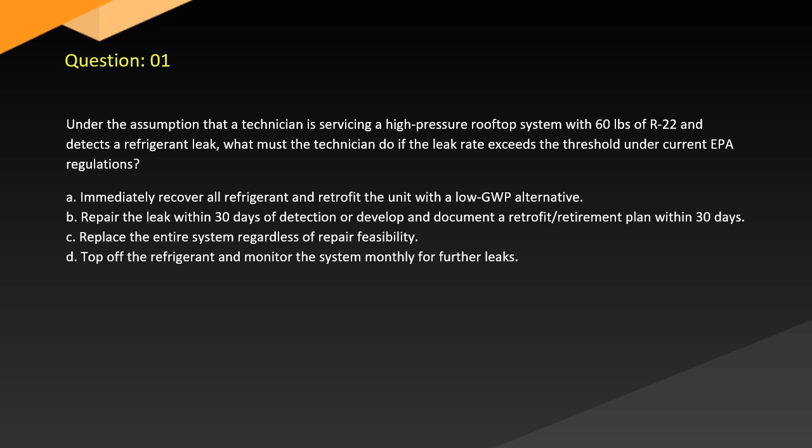Answer: Correct answer B. Explanation: For systems containing 50 pounds or more of refrigerant, EPA requires that leaks be repaired within 30 days if the leak rate exceeds 20% annually for comfort cooling or 30% for commercial refrigeration, per 40 CFR Part 82, Subpart F. If repair isn't feasible, a retrofit retirement plan must be documented within 30 days.

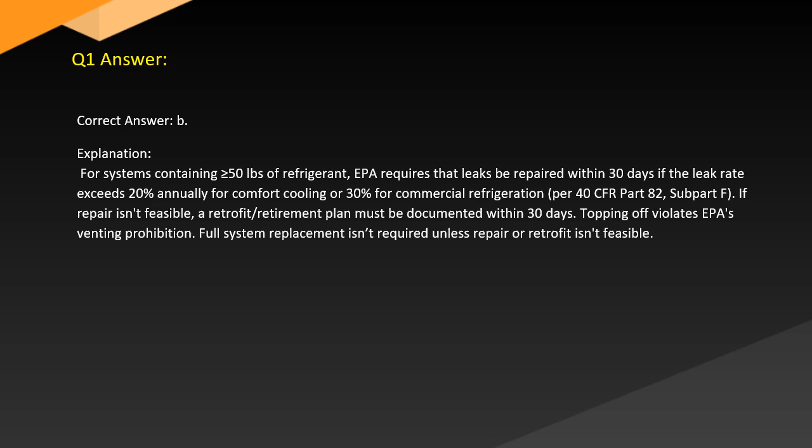Topping off violates EPA's venting prohibition. Full system replacement isn't required unless repair or retrofit isn't feasible.

Question 2. By evaluating the recovery method for a high-pressure appliance that has a functioning compressor and holds over 15 pounds of R-410A, which recovery technique must be used according to EPA regulations?

A. Passive recovery, using internal pressure to force refrigerant into a container. B. System-dependent recovery, relying on system pressure, a non-mechanical method. C. Active recovery with self-contained recovery equipment capable of achieving mandated vacuum levels. D. Gravity-fed transfer into an unpressurized recovery drum.

Answer: Correct answer C. Explanation: EPA requires the use of active, self-contained recovery equipment for appliances containing more than 15 pounds of refrigerant, per 40 CFR 82.156. Passive recovery is not permitted for high-pressure appliances.

System-dependent recovery is limited to small appliances. Only active recovery ensures required vacuum levels per EPA evacuation requirements, Table 1, 40 CFR 82.156.

Question 3. In light of recent developments, a facility upgraded a high-pressure chiller to use a new refrigerant blend with higher operating pressures. The technician plans to reuse the existing pressure relief valve. What should the technician consider?

A. Relief valves can be reused as long as they have not discharged. B. A new relief valve is only required if the refrigerant is flammable. C. Relief valves must be rated for the new refrigerant's pressure and replaced if incompatible. D. Pressure relief valves are universal and need no modification.

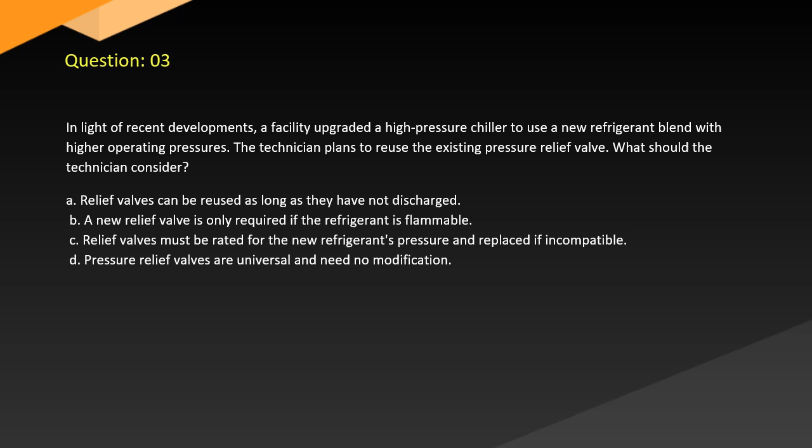Answer: Correct answer C. Explanation: Pressure relief devices must be compatible with the new refrigerant's pressure characteristics. Using an old relief valve may result in under or overpressurization.

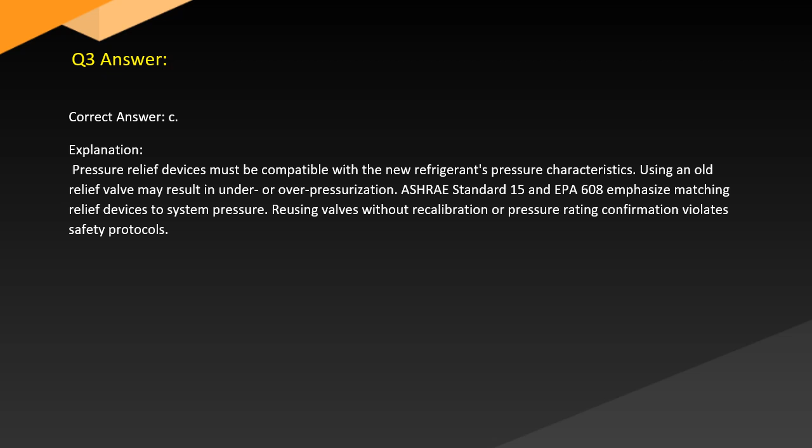ASHRAE Standard 15 and EPA 608 emphasize matching relief devices to system pressure. Reusing valves without recalibration or pressure rating confirmation violates safety protocols.

Question 4. While examining refrigerant blends used as substitutes for phased-out HCFCs, why is it critical to charge a zeotropic blend like R-407C in the liquid state?

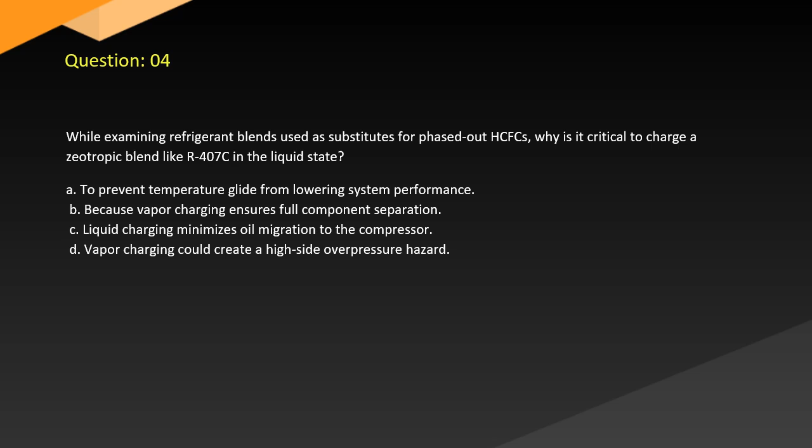A. To prevent temperature glide from lowering system performance. B. Because vapor charging ensures full component separation. C. Liquid charging minimizes oil migration to the compressor. D. Vapor charging could create a high side overpressure hazard.

Answer: Correct answer A. Explanation: Zeotropic blends, e.g. R-407C, have component refrigerants that evaporate at different rates, leading to composition shift during vapor charging. Charging in liquid form ensures blend integrity, preventing fractionation and maintaining temperature glide within expected limits.

Per AHRI Guideline N and EPA guidance, vapor charging is prohibited for blends like R-407C.

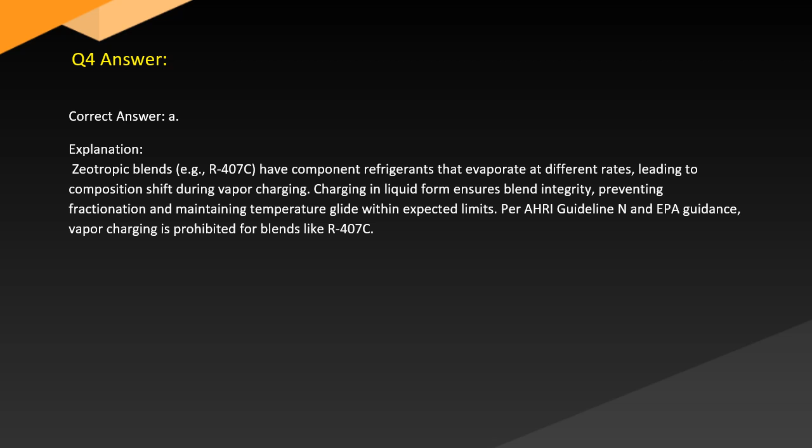Question 5. From a practical standpoint, which of the following is a compliant and safe method for transporting recovered refrigerant cylinders? A. Storing the cylinder horizontally in a sealed plastic container.

B. Securing the cylinder upright with proper DOT labeling in a ventilated vehicle. C. Placing the cylinder in the passenger seat with air conditioning on. D. Keeping the cylinder in the trunk with windows closed to avoid vapor escape.

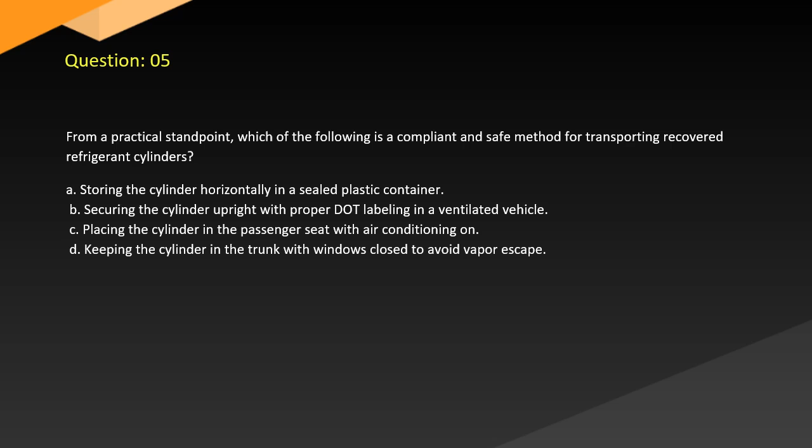Answer: Correct answer B. Explanation: Regulations 49 CFR Parts 171, 180 and EPA guidelines require that recovery cylinders be upright, properly labeled, capped and transported in a ventilated space. Storing horizontally may damage valves.

Closed environments risk asphyxiation or fire hazards if leaks occur. Safety mandates upright transport with appropriate cylinder marking, e.g. refrigerant recovery.

Question 6. Considering the evidence, a technician is charging a high-pressure R-410A system with a fixed orifice metering device. What is the most accurate method to determine proper charge?

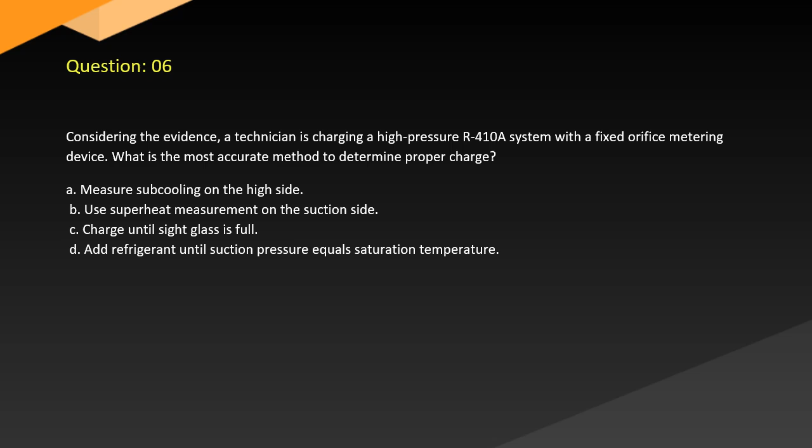A. Measure subcooling on the high side. B. Use superheat measurement on the suction side. C. Charge until sight glass is full. D. Add refrigerant until suction pressure equals saturation temperature.

Correct answer: B. For systems with fixed orifice metering devices, the superheat method is recommended to ensure proper charge per manufacturer specs and EPA guidelines. Subcooling is more accurate with TXVs. Sight glasses are unreliable, and suction pressure alone doesn't reflect charge accuracy. EPA 608 training materials and AHRI/ACCA protocols support superheat charging in these cases.

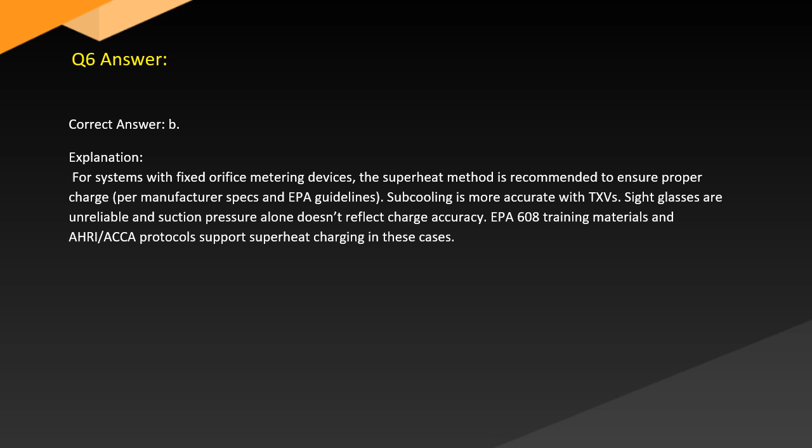Question 7. Demonstrated by best practices when evacuating a high-pressure system with over 200 pounds of R22 before opening the system for service, what minimum vacuum level must be achieved using recovery equipment manufactured after November 15, 1993? A. 10 inches of Hg. B. 15 inches of Hg. C. 0 inches of Hg. D. 10 millimeters Hg absolute.

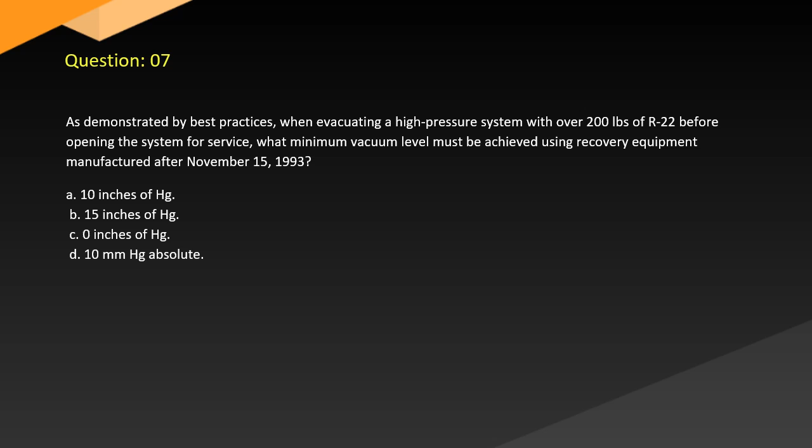Correct answer: D. According to EPA Table 1 of 40 CFR 82.156, for high-pressure appliances with over 200 pounds of refrigerant, recovery equipment manufactured after 11/15/1993 must evacuate to 10 mm Hg absolute. This ensures removal of both refrigerant and moisture. Using inches of mercury or imprecise measures does not meet the regulatory standard for evacuation.

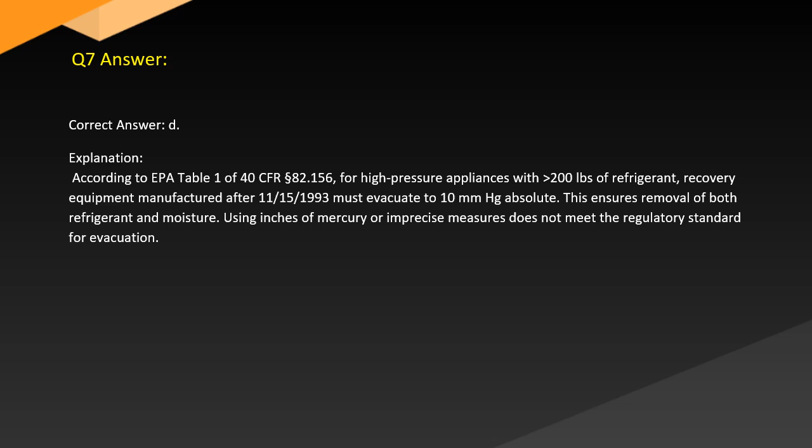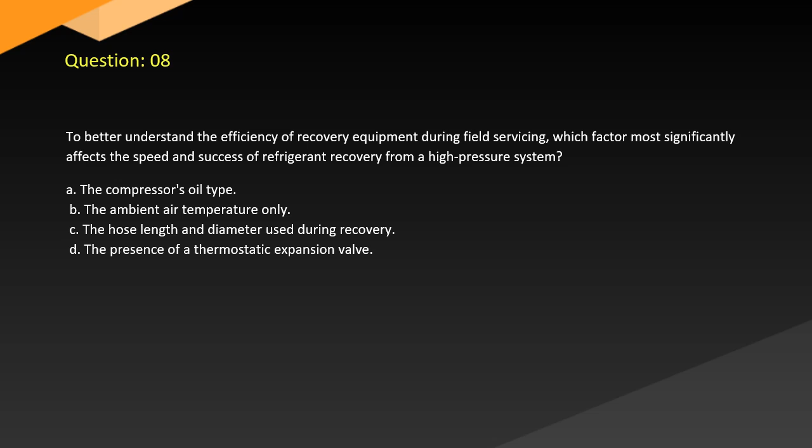Question 8. To better understand the efficiency of recovery equipment during field servicing, which factor most significantly affects the speed and success of refrigerant recovery from a high-pressure system? A. The compressor's oil type. B. The ambient air temperature only. C. The hose length and diameter used during recovery. D. The presence of a thermostatic expansion valve.

Correct answer: C. Hose size significantly impacts recovery time. Shorter hoses with larger internal diameters reduce pressure drop, increasing flow rate, as supported by EPA and equipment manufacturers. While ambient temperature has some effect, it's secondary; oil type and metering devices do not directly affect recovery efficiency. Always follow recovery equipment guidelines.

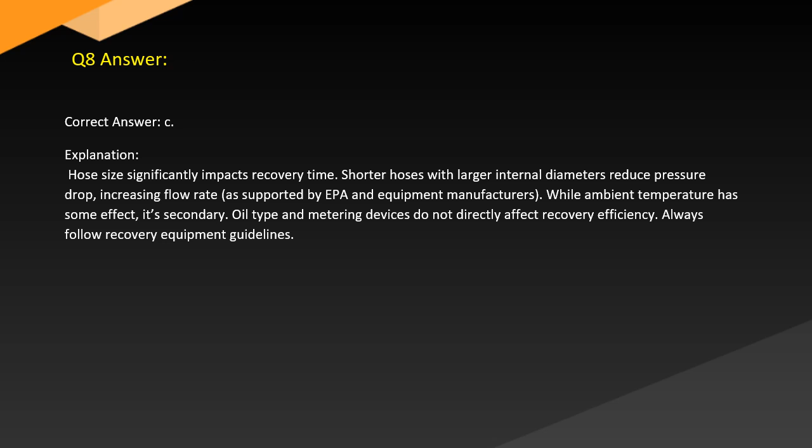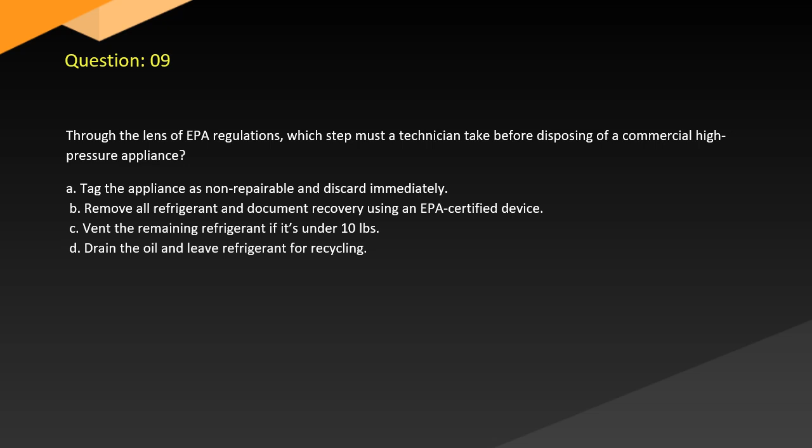Question 9. Through the lens of EPA regulations, which step must a technician take before disposing of a commercial high-pressure appliance? A. Tag the appliance as non-repairable and discard immediately. B. Remove all refrigerant and document recovery using an EPA-certified device. C. Vent the remaining refrigerant if it's under 10 pounds. D. Drain the oil and leave refrigerant for recycling.

Correct answer: B. EPA prohibits venting of refrigerants per 40 CFR 82.154. Technicians must recover all refrigerant using certified equipment and maintain proper records. Failure to recover refrigerant prior to disposal violates the Clean Air Act. Tagging or draining oil alone does not satisfy the recovery requirement.

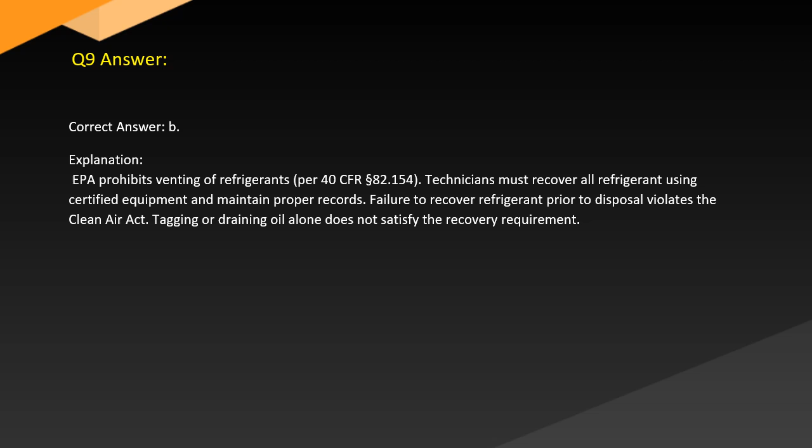Question 10. Given the circumstances, Mr. Bennett is servicing a commercial refrigeration rack system and needs to isolate a leaking evaporator coil without recovering refrigerant from the entire system. What is a compliant method to isolate the component? A. Close service valves to isolate the coil and leave refrigerant trapped. B. Use a recovery machine to pull refrigerant from the coil before opening it. C. Open the coil and let the system's high pressure expel the refrigerant. D. Lower system charge by venting to atmosphere and isolate afterward.

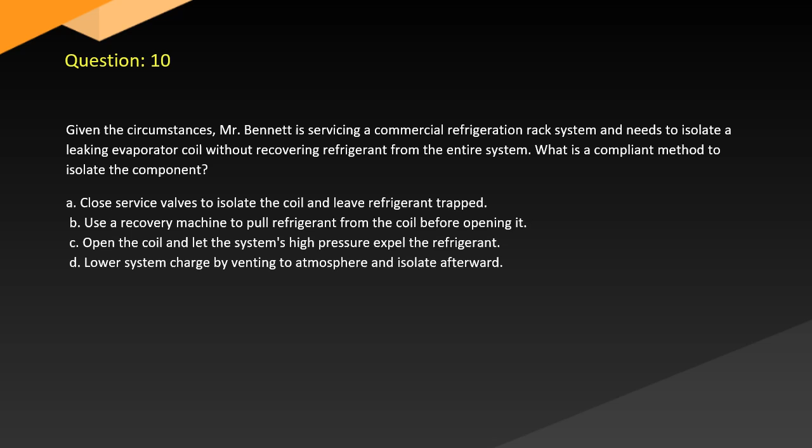Correct answer: B. EPA regulations, 40 CFR 82.156, require recovery of refrigerant before opening any part of the system. Even isolated components must be evacuated to required levels. Venting refrigerant or relying on valve isolation without recovery violates the Clean Air Act. Using a certified recovery unit is the only compliant method.

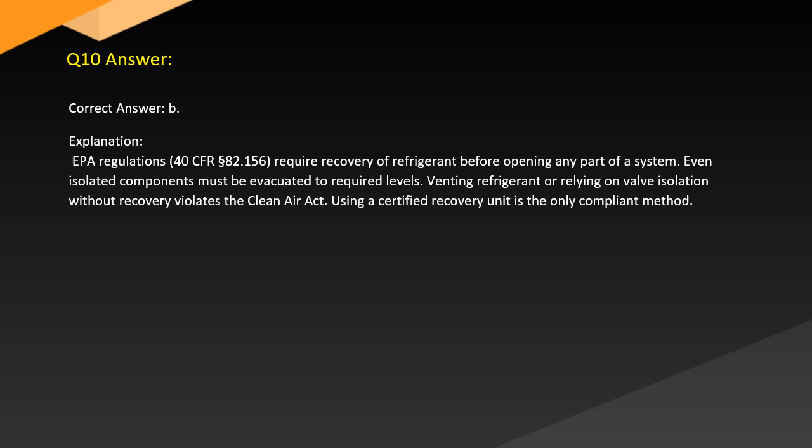Question 11. A detailed analysis of a high-pressure recovery cylinder revealed rising pressure during storage even though ambient temperatures remained constant. What is the most likely cause? A. Excess lubricant entering the cylinder during recovery. B. Cylinder valve left partially open after sealing. C. Presence of non-condensable gases in the recovered refrigerant. D. Low refrigerant purity due to oil breakdown.

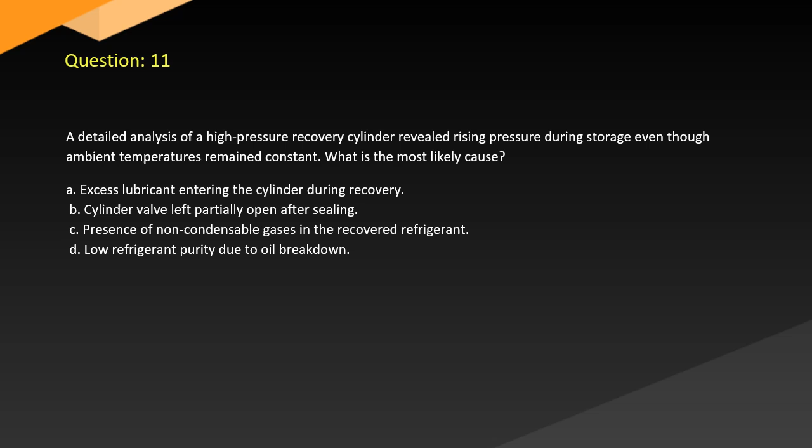Correct answer: C. Non-condensables, such as air and nitrogen, do not condense under normal system pressures and temperatures, increasing system or storage pressure, according to EPA guidelines and ARI Standard 700. Recovered refrigerant must be tested for purity, especially before reuse. These contaminants degrade system efficiency and may trigger safety valves. Valve or oil issues wouldn't explain stable ambient pressure rise.

Question 12. Contrary to popular belief, why is it unsafe to use mineral oil with R-410A in high-pressure systems? A. Mineral oil causes high moisture retention in R-410A systems. B. Mineral oil reacts chemically with hydrofluorocarbons, causing corrosion. C. R-410A has poor miscibility with mineral oil, risking inadequate lubrication. D. Mineral oil solidifies under high pressures generated by R-410A.

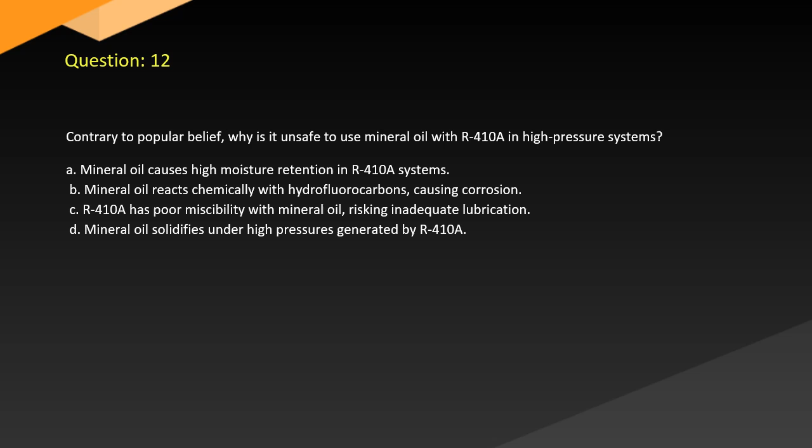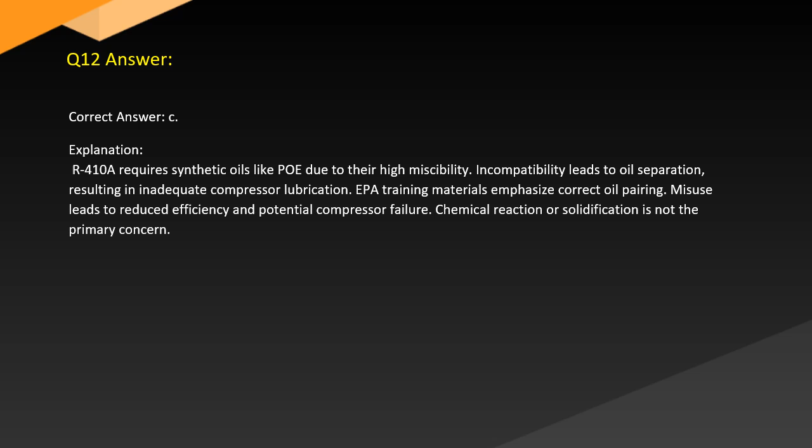Correct answer: C. Explanation: R410A requires synthetic oils like POE due to their high miscibility. Incompatibility leads to oil separation, resulting in inadequate compressor lubrication. EPA training materials emphasize correct oil pairing. Misuse leads to reduced efficiency and potential compressor failure. Chemical reaction or solidification is not the primary concern.

Correct answer: C. Explanation: Opening a high side port under system pressure can release pressurized refrigerant rapidly, risking frostbite, burns, or hose rupture. EPA safety guidelines mandate depressurization or system shutdown before such actions. There is no immediate oil freezing or acid formation at this stage. Backflow relates to improper cylinder use, not port access.

Question 14. The underlying principle of installing a receiver in a high-pressure system is to: A. Prevent liquid refrigerant from reaching the expansion device. B. Isolate oil from refrigerant before it enters the metering device. C. Temporarily store excess liquid refrigerant during system operation. D. Directly filter out moisture from the suction line.

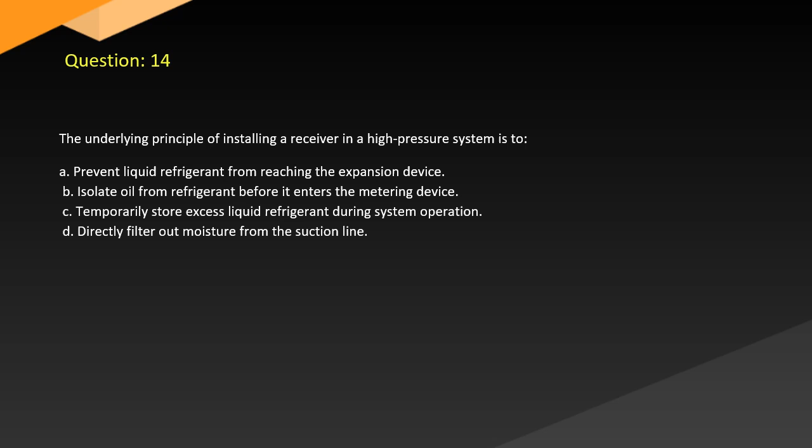Correct answer: C. Explanation: Receivers store excess liquid refrigerant downstream of the condenser, especially in systems with variable load or ambient conditions. They help prevent flooding of the evaporator or metering device. Moisture removal is handled by filter dryers, not receivers. Accumulators on suction lines protect compressors, not receivers.

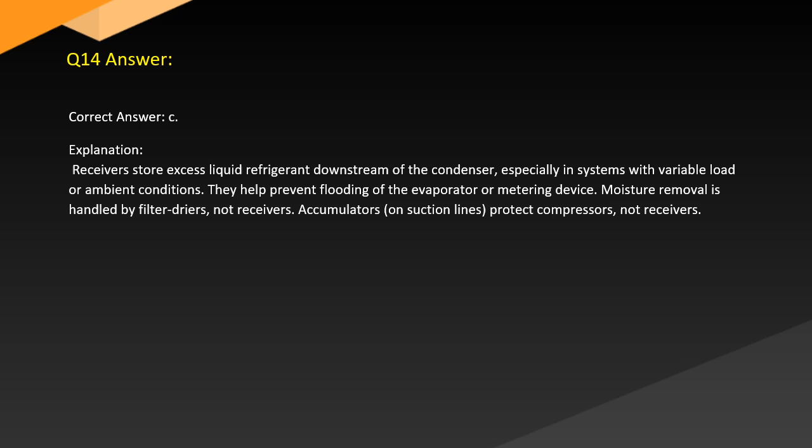Question 15. In comparison with previous inspections, a supermarket technician notes that a 250 lb R404 rack system has lost 75 pounds in 90 days. What is the leak rate and is it within EPA limits? A. 27%. Must be repaired or plans submitted. B. 32%. Exceeds limits and must be repaired within 30 days. C. 24%. Within acceptable EPA threshold. D. 30%. Requires retrofit. Plan only if repair isn't feasible.

Correct answer: B. Explanation: Leak rate equals 75 divided by 250, times 365 divided by 90, equals approximately 32%. For commercial refrigeration, EPA's maximum annual allowable leak rate is 20%, per 40 CFR Section 82.157. Leak exceeding that must be repaired or addressed with a documented plan. 32% exceeds limits and requires corrective action within 30 days.

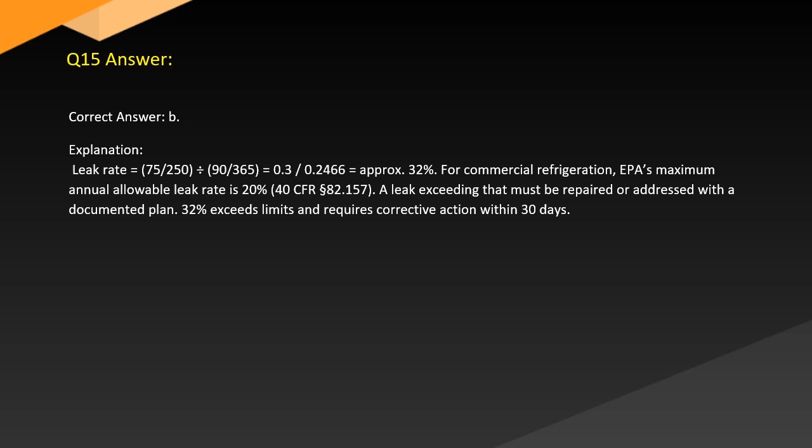Question 16. By comparing moisture removal techniques, which condition best facilitates deep system dehydration using a vacuum pump? A. Using a high CFM vacuum pump on a warm system. B. Applying heat while pumping through the suction port only. C. Operating a vacuum pump while charging refrigerant vapor. D. Recovering oil first, then evacuating with an air compressor.

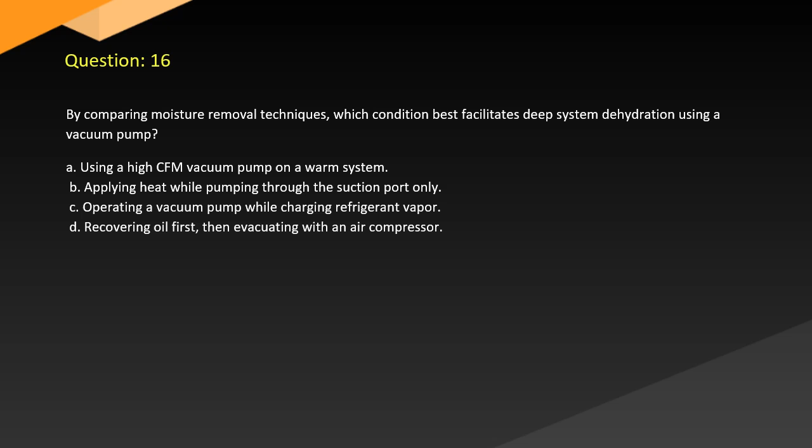Correct answer: A. Explanation: Heat increases moisture vapor pressure, enhancing vacuum pump effectiveness. A high-capacity pump reduces evacuation time. Charging during evacuation introduces contaminants. Air compressors are not approved. EPA and ASE guidance stress warm systems and proper CFM rating for thorough dehydration.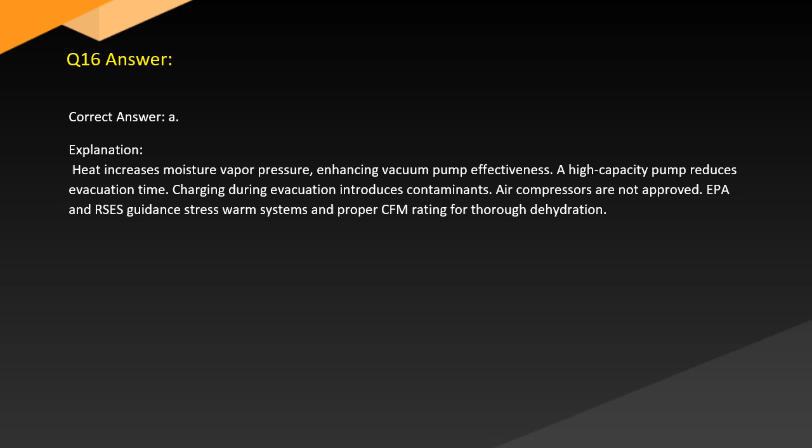Question 17. From multiple perspectives, what is the most appropriate response if recovered R22 is suspected to be contaminated with air? A. Return it to the system slowly to avoid damage. B. Filter and reuse it immediately. C. Send it to a certified reclaimer for processing. D. Vent the air portion and reuse the refrigerant.

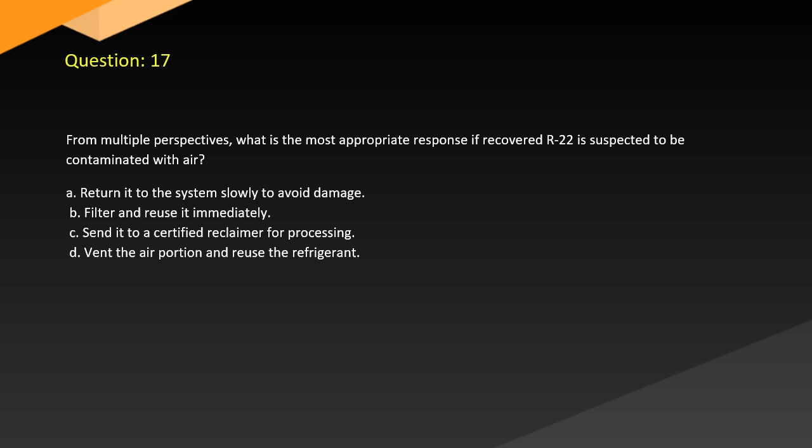Correct answer: C. Explanation: Venting is illegal under the Clean Air Act, 40 CFR Section 82.154. Reuse of contaminated refrigerant can damage systems. Only certified reclaimers, EPA certified under Section 608, can restore refrigerant to AHRI 700 purity. Filtering doesn't remove non-condensables. Reuse without reprocessing violates EPA and AHRI standards.

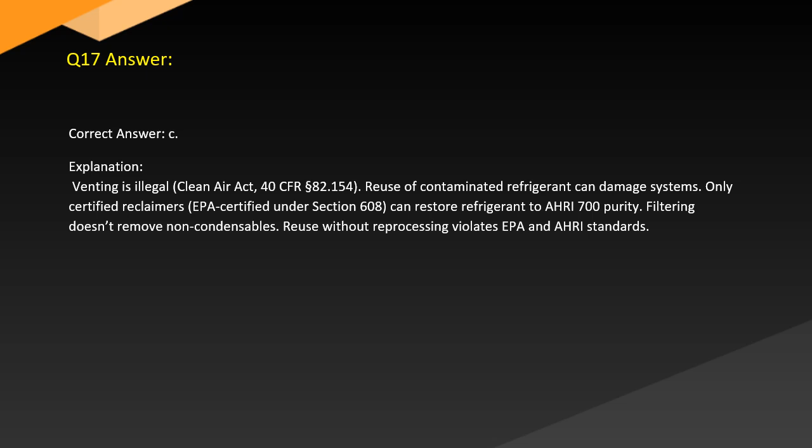Question 18. As evidenced by best practices for R410A systems with microchannel coils, which charging method is most accurate and prevents system damage? A. Superheat method regardless of metering device. B. Use of a charging chart with pressure temperature matching. C. Weigh-in method using manufacturer's exact charge. D. Charging until the suction line feels cool.

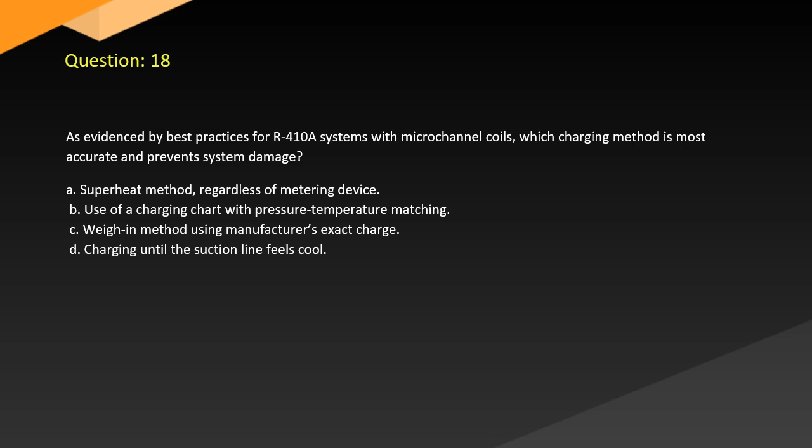Correct answer: C. Explanation: Microchannel systems are charge sensitive. Manufacturers specify precise charge amounts that must be weighed in. Feeling suction lines is imprecise. Superheat or subcooling is valid under certain conditions, but weigh-in ensures compliance with factory specs. EPA and OEM manuals favor weighing for accuracy and system integrity.

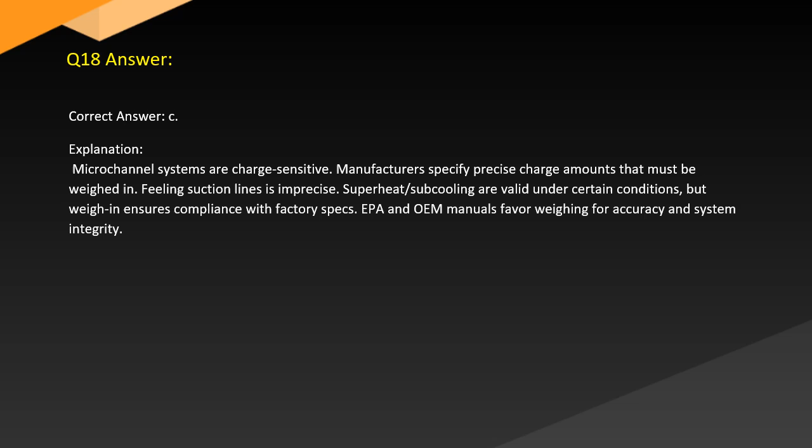Question 19. The core principles of Section 608 of the Clean Air Act primarily aim to: A. Restrict manufacturers from producing new refrigeration appliances. B. Eliminate all use of refrigerants in HVAC systems. C. Reduce emissions of ozone-depleting substances and regulate refrigerant handling. D. Increase production of synthetic refrigerants to boost industry growth.

Answer: C. Section 608 regulates refrigerant handling, leak repair, recovery, and certification of technicians to minimize ozone-depleting emissions. It doesn't ban HVAC systems or synthetic refrigerants. The rule supports safe practices while complying with U.S. obligations under the Montreal Protocol. Refer to EPA's 40 CFR Part 82 for specific mandates.

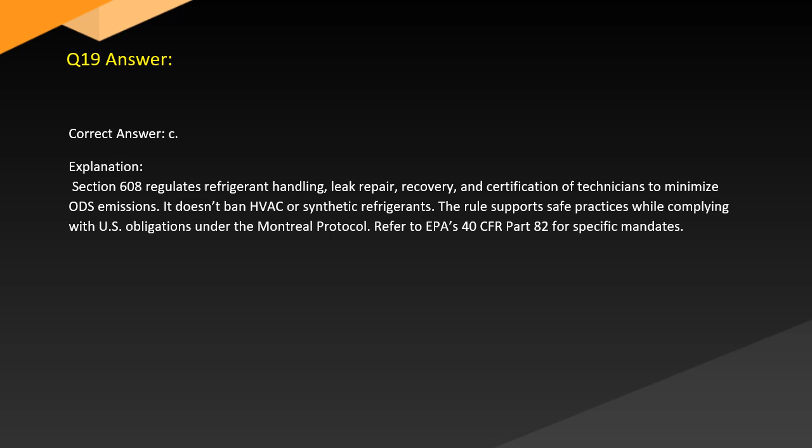Question 20. In response to global environmental damage, what was the main objective of the Montreal Protocol? A. Encourage use of low-GWP hydrocarbons in all sectors. B. Standardize refrigerant cylinder color codes worldwide. C. Phase out production of ozone-depleting substances globally. D. Mandate licensing for all HVAC system owners.

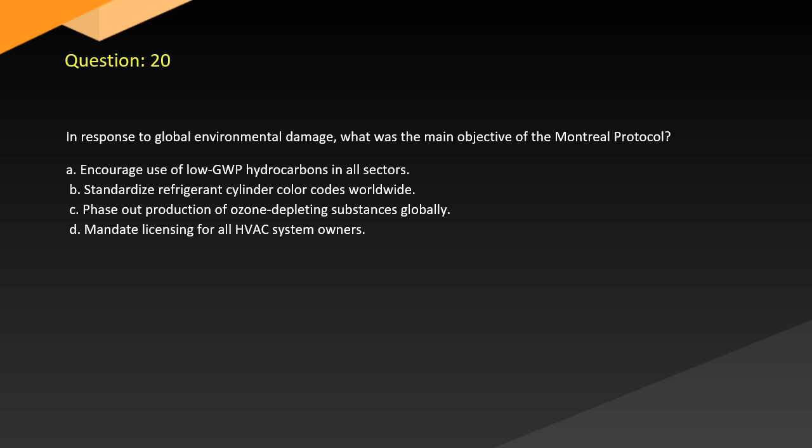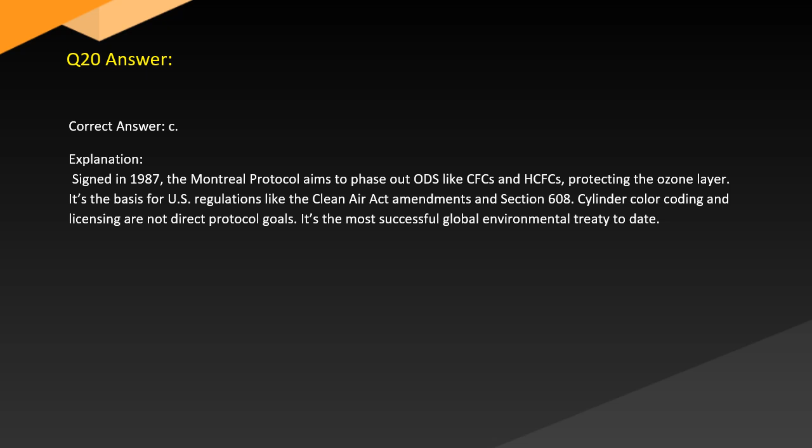Answer: C. Signed in 1987, the Montreal Protocol aims to phase out ozone-depleting substances like CFCs and HCFCs, protecting the ozone layer. It's the basis for U.S. regulations like the Clean Air Act amendments and Section 608. Cylinder color coding and licensing are not direct protocol goals. It's the most successful global environmental treaty to date.

Question 21. Throughout the course of routine maintenance, a technician is evaluating a system charged with R-410A. Compared to R-22, what specific safety consideration must the technician observe when working with R-410A? A. It operates at significantly low pressures and may not trigger high-pressure cutouts. B. R-410A is toxic when exposed to moisture and requires full-face respirators. C. R-410A operates at significantly higher pressures and requires specially rated tools and equipment. D. It is a blend that cannot be stored in recovery cylinders.

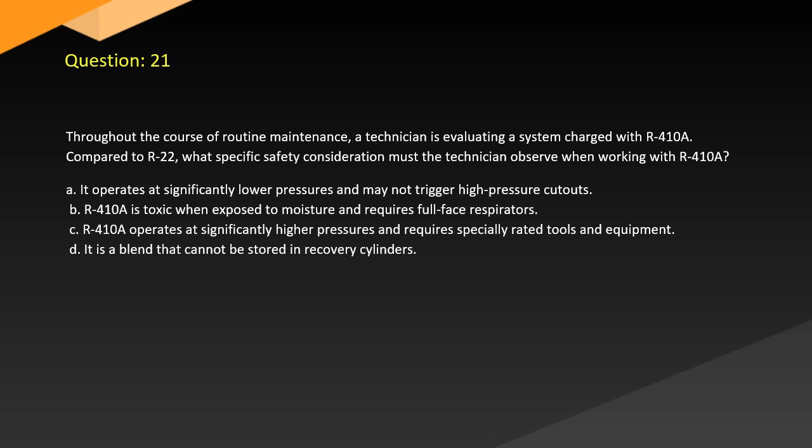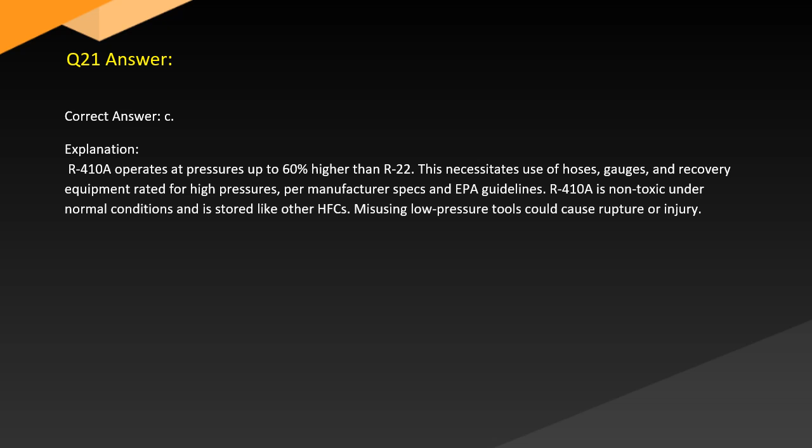Answer: C. R-410A operates at pressures up to 60% higher than R-22. This necessitates use of hoses, gauges, and recovery equipment rated for high pressures per manufacturer specs and EPA guidelines. R-410A is non-toxic under normal conditions and is stored like other HFCs. Misusing low-pressure tools could cause rupture or injury.

Question 22. Examining the consequences of improper disposal, which step is mandatory before scrapping a high-pressure HVAC system? A. Remove all refrigerant using EPA-certified recovery equipment. B. Document oil content and forward it to a certified lab. C. Replace all O-rings and seals with inert caps. D. Run the compressor for 10 minutes to purge the refrigerant.

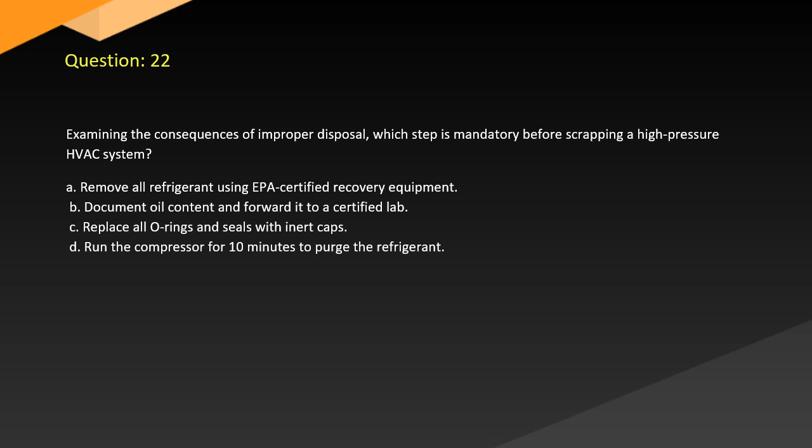Answer: A. According to 40 CFR 82.154, all refrigerant must be recovered using certified equipment before disposing of an appliance. There is no requirement to test oil before disposal. Running compressors or modifying seals does not meet EPA regulations. Failure to recover refrigerant is considered illegal venting.

Question 23. While it is true that electronic leak detectors are widely used, which method provides the most precise verification of a small leak in a high-pressure system suspected of leaking around brazed joints? A. Monitoring compressor amperage over time. B. Applying an ultrasonic detector to the suction line. C. Using a trace gas with nitrogen and soap bubble solution. D. Checking temperature difference across evaporator coil.

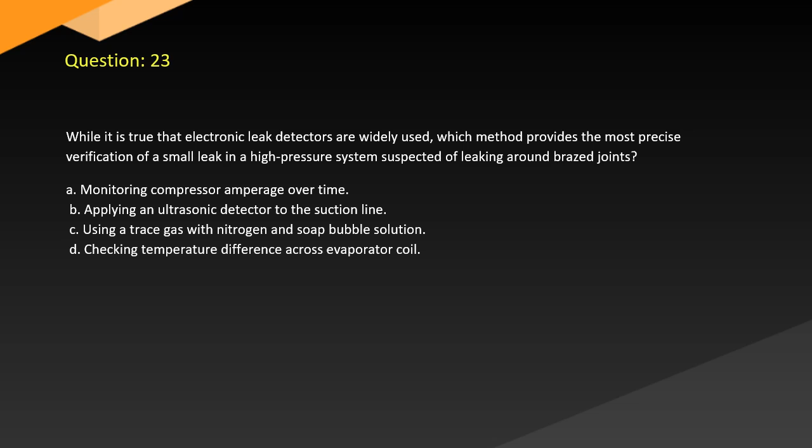Answer: C. The soap bubble method using trace refrigerant and nitrogen as a carrier offers visual confirmation of microleaks. Electronic and ultrasonic detectors are helpful but may provide false positives. Temperature differences and compressor current changes are indirect indicators and not specific to leak location. EPA training emphasizes trace gas and visual confirmation.

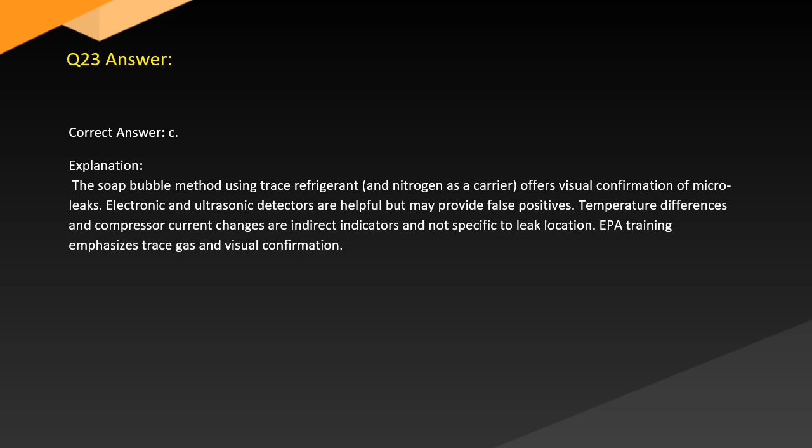Question 24. From a historical standpoint, what is the primary reason technicians are advised to wear protective gloves and goggles during refrigerant recovery? A. To prevent oil absorption into the skin. B. To guard against acid burns from used refrigerant. C. To prevent frostbite and eye injury from liquid refrigerant exposure. D. To maintain compliance with the OSHA toxic gas policy.

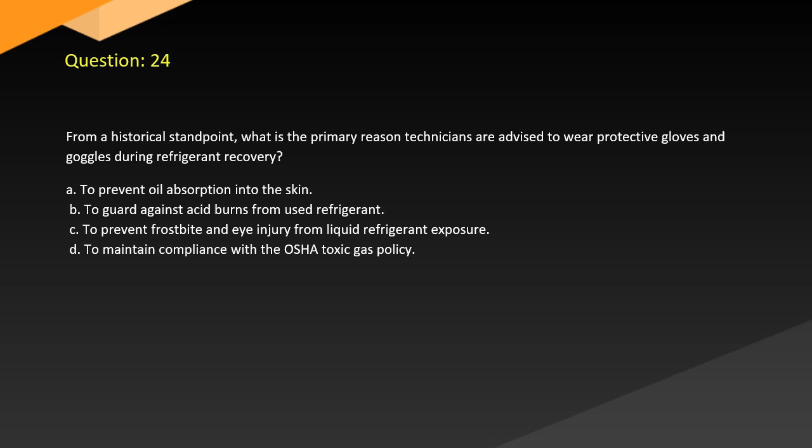Answer: C. Refrigerant rapidly evaporates at atmospheric pressure, causing frostbite or eye damage on contact. EPA and OSHA both emphasize personal protective equipment (PPE) to prevent exposure. Gloves protect from freeze burns, goggles shield against eye injuries. Acid burns are possible from contaminated systems, but frostbite is the primary risk.

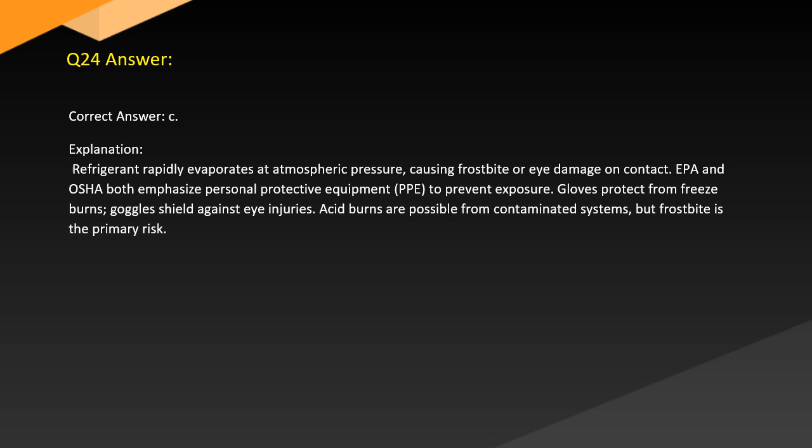Question 25. Based on the information, what is the most efficient method to recover refrigerant from a high-pressure system with a functional compressor and large receiver?

A. Use the system compressor to push refrigerant into a recovery cylinder, then finish with a recovery machine. B. Rely solely on gravity feed and open all service valves. C. Vent refrigerant slowly into the atmosphere before opening the receiver. D. Remove the receiver, place it on a scale, and drain it through the suction line.

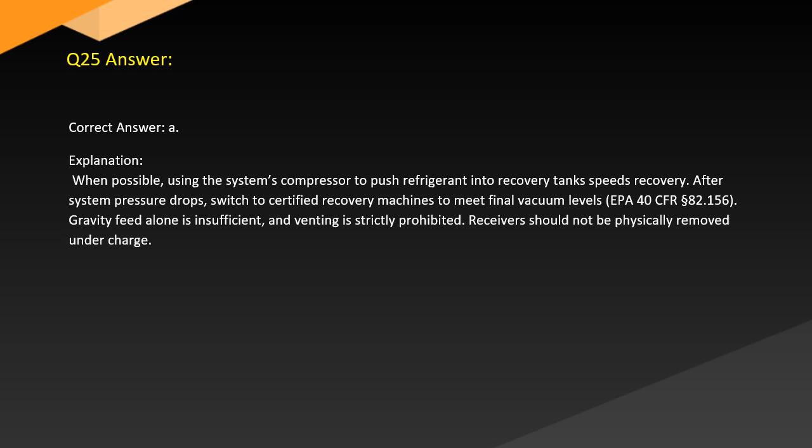Answer: Correct answer A. Explanation: When possible, using the system's compressor to push refrigerant into the recovery tank speeds recovery. After system pressure drops, switch to certified recovery machines to meet final vacuum levels. Per EPA 40 CFR 82.156, gravity feed alone is insufficient and venting is strictly prohibited. Receivers should not be physically removed under charge.

Question 26. With the advent of low-GWP refrigerants, the technician decides to retrofit a commercial system originally using R22. Which of the following steps must be completed before charging with the replacement refrigerant?

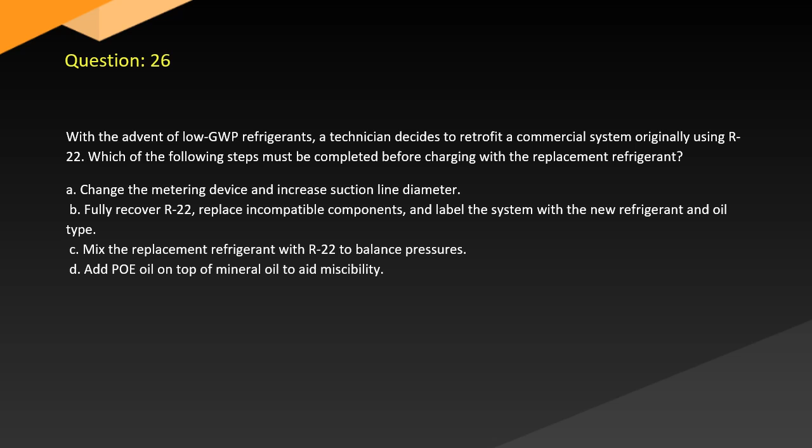A. Change the metering device and increase suction line diameter. B. Fully recover R22, replace incompatible components and label the system with the new refrigerant and oil type. C. Mix the replacement refrigerant with R22 to balance pressures. D. Add POE oil on top of mineral oil to aid miscibility.

Answer: Correct answer B. Explanation: EPA mandates full recovery of the original refrigerant before retrofit, per 40 CFR 82.155. The system must be labeled with the new refrigerant and compatible oil. Mixing refrigerants is illegal and unsafe. Oil layering does not guarantee compatibility. Some components like seals and metering devices may also need replacement.

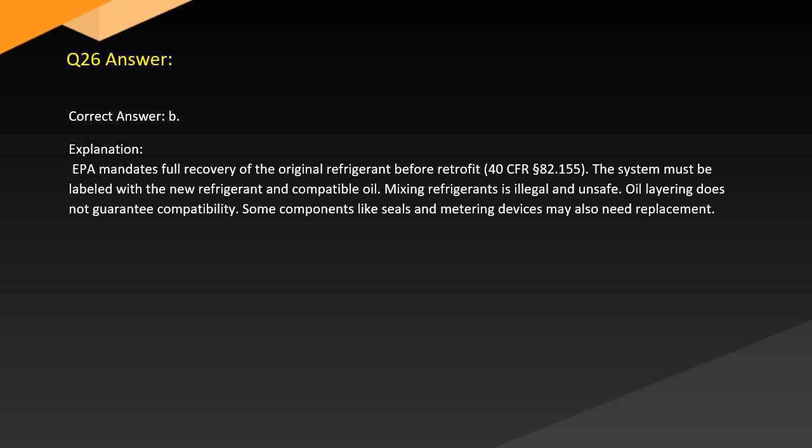Question 27. When evaluating the merits of different charging methods for a TXV-equipped R-134a system, what should be the technician's preferred method for accurate charging?

A. Weigh the refrigerant in based on system tonnage. B. Monitor superheat on the suction line. C. Measure subcooling at the liquid line. D. Check sight glass for steady bubbles.

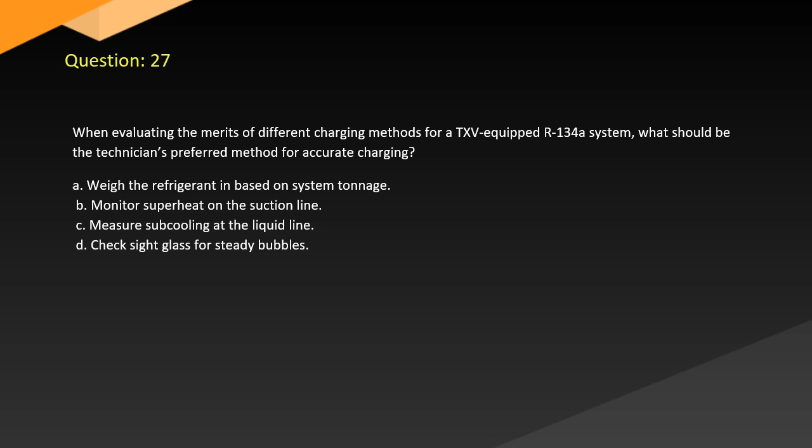Answer: Correct answer C. Explanation: With TXVs, subcooling is the preferred method to ensure proper condenser performance and charge level. Superheat is better for fixed orifice systems. Tonnage-based weighing is an estimate, not precision. Sight glasses are not fully reliable. EPA and OEM protocols support subcooling methods for TXV systems.

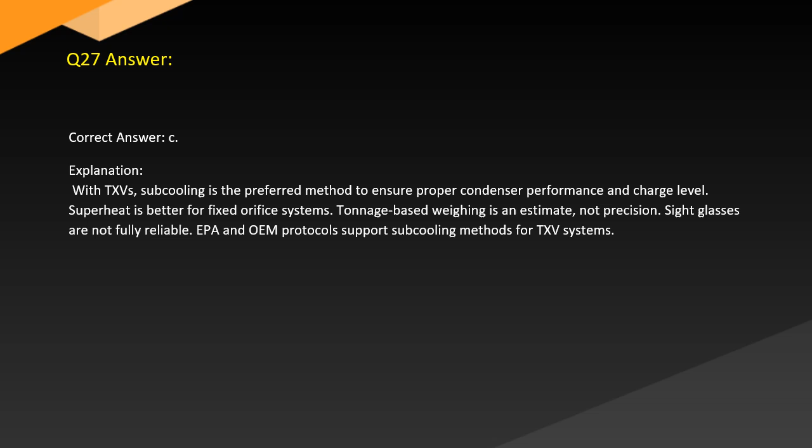Question 28. The effectiveness of recovery equipment is heavily dependent on regular maintenance. What routine practice is essential for ensuring recovery efficiency and regulatory compliance?

A. Replacing compressor oil with refrigerant oil monthly. B. Cleaning or replacing inlet filters and checking for oil contamination. C. Recalibrating the manifold gauge every week. D. Filling recovery cylinders to 95% to maximize storage.

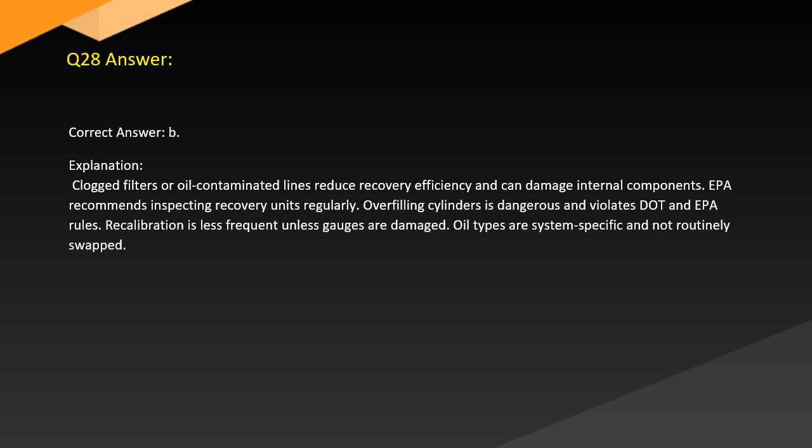Answer: Correct answer B. Explanation: Clogged filters or oil-contaminated lines reduce recovery efficiency and can damage internal components. EPA recommends inspecting recovery units regularly. Overfilling cylinders is dangerous and violates DOT and EPA rules. Recalibration is less frequent unless gauges are damaged. Oil types are system-specific and not routinely swapped.

Question 29. The traditional approach to appliance servicing often led to refrigerant venting. Under EPA's Section 608 rules, what practice is strictly prohibited during refrigerant recovery?

A. Using recovery equipment that pulls below 0 psig. B. Venting residual refrigerant from hoses during disconnection. C. Evacuating to 15 inches HG on high-pressure appliances. D. Labeling cylinders without DOT approval.

Answer: Correct answer B. Explanation: Even small releases during hose disconnection are considered illegal venting unless recovery of line refrigerant is performed. EPA requires technicians to use low-loss fittings or refrigerant management practices to prevent venting, per 40 CFR 82.154. Evacuation levels and cylinder labeling are also regulated, but venting is the central violation.

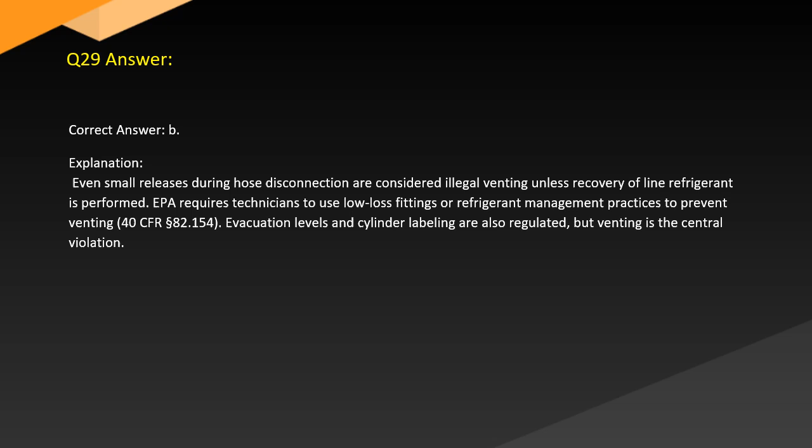Question 30. Taking into account the need to service a liquid line filter dryer in a running high-pressure system, what should technician Rosario do before opening the line?

A. Turn off the condenser fan motor only. B. Isolate the section with valves and recover refrigerant from the isolated area. C. Shut down the evaporator while leaving the compressor running. D. Release a small portion of pressure from the access port before cutting.

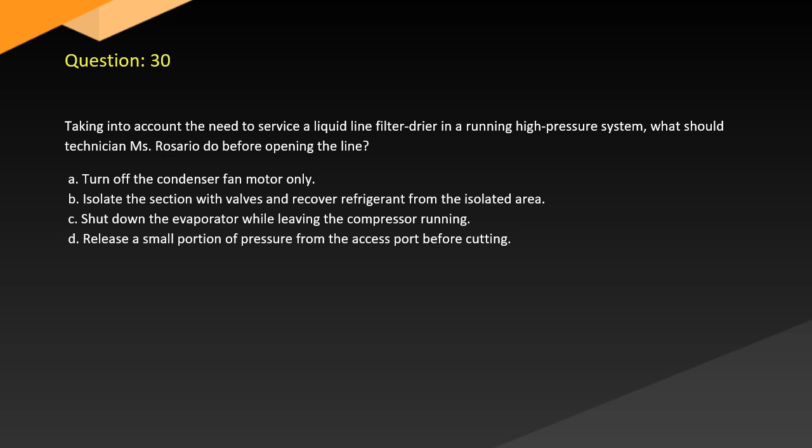Answer: Correct answer B. Explanation: EPA requires that all refrigerant in any part of a system to be opened must first be recovered, per 40 CFR 82.156. Isolating the section, then recovering its contents before service is compliant and safe. Partial shutdowns or pressure releases do not meet legal standards and pose safety risks.